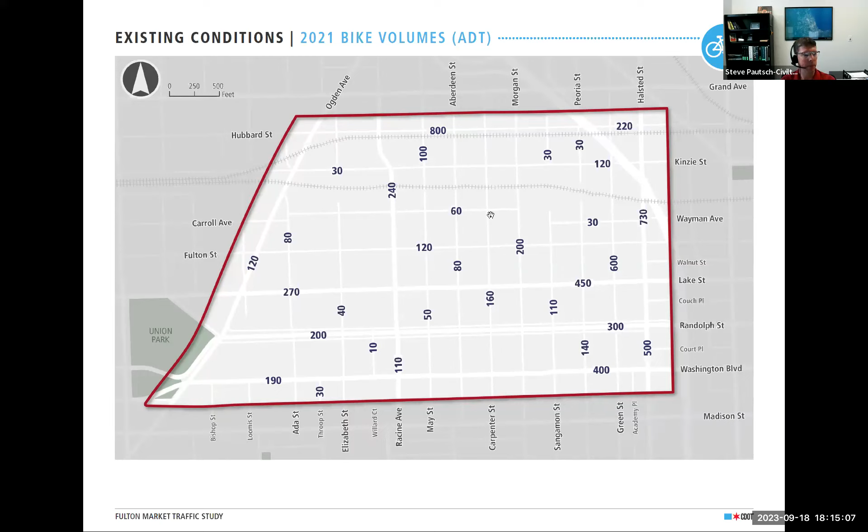Part of our data collection, we're being very multimodal—we're collecting all types of data. This map shows the bike volumes observed over a 24-hour period. I'd say this is more of an order-of-magnitude way to compare one street to another, since bike volumes are so variable depending on the weather and time of year. But you can see the streets experiencing heavier bike traffic than others.

And then traffic volumes—this is the number of cars counted on each street in a 24-hour period. Most traffic by far is on Ogden here in the West End. Lake and Halsted also have fairly heavy volumes compared to other streets. The north-south streets have fairly similar volumes, most in that 2,000 to 4,000 cars per day range. The one that sticks out is Green Street, with more than 7,000 vehicles per day.

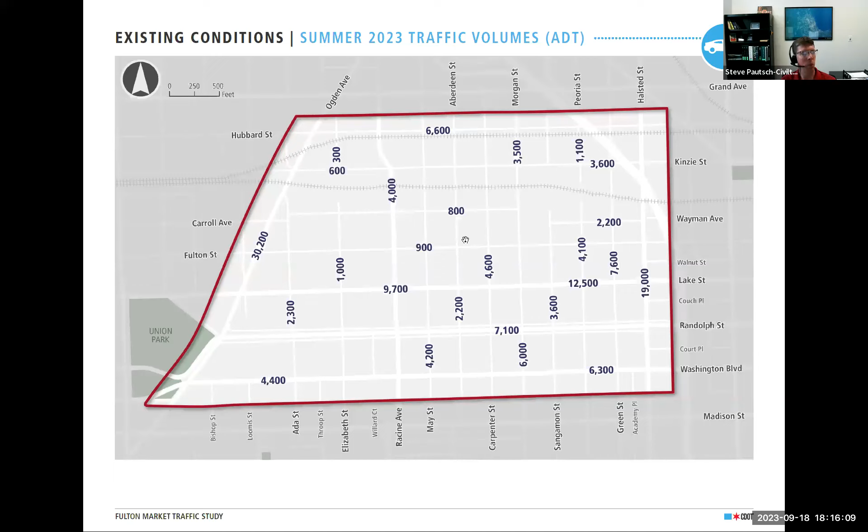So most of the streets we're seeing don't have extremely heavy volumes like you'd see in some other dense areas like River North. I think that's due to the geography of Fulton Market area, where a lot of the streets are discontinuous—they don't connect to other streets outside Fulton Market. That helps keep the volumes fairly low.

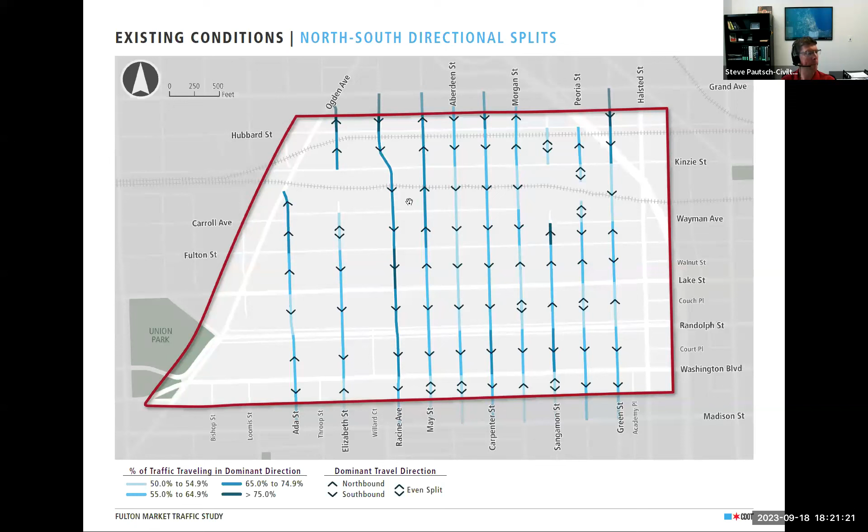Some other data we've collected—street widths and potential pinch points—is what this graphic illustrates. The red lines here are streets less than 34 feet wide, which we consider a bit narrow, especially if parking is allowed on both sides. You see that mainly on Racine, also on Ada Street, with a couple of other pinch points: a narrow spot on Morgan south of Lake, and also on Green south of Wayman.

Some other pinch points are shown on this map. These blue stars indicate a significant restaurant or hotel use—spots where there's often valet or other pronounced curbside activity, and perhaps places more likely to have double parking. We see that mostly in the eastern part of the study area, and also diagonal parking indicated by these slash marks. That diagonal parking can add a little friction, especially with high turnover and lots of cars pulling in and out, which can slow traffic a bit. So we wanted to show those locations.

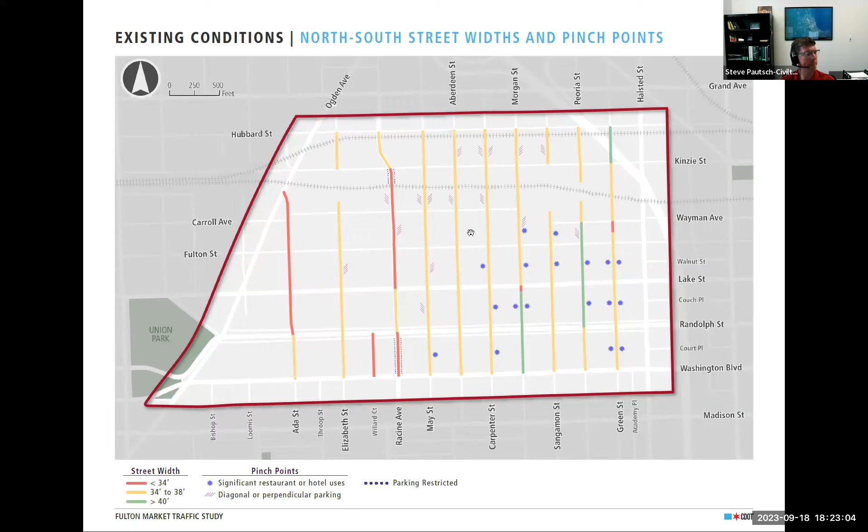When considering one-way versus two-way travel, there's an inherent set of positives and negatives to each configuration. So we wanted to think about each one when considering potential directional changes. These are shown on the screen here.

Benefits for one-way streets: wherever there's double parking or construction, there'd be fewer delays as cars can more easily navigate around the obstruction. In many cases, one-way streets can lessen the risk of sideswipe or parked car crashes, especially on narrow streets. If you're crossing the street, you only have to look one direction for approaching traffic. One-way streets can also free up space to install other amenities within the right-of-way, probably most commonly bike lanes.

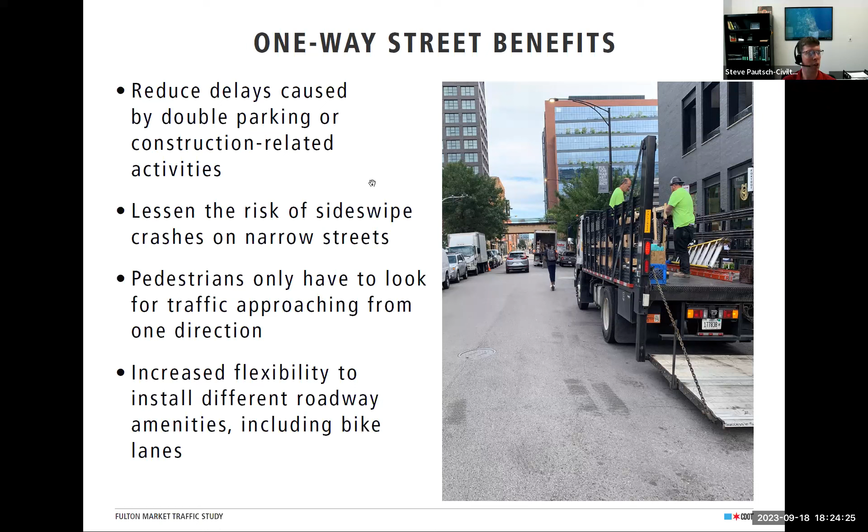But there are also some trade-offs, some challenges with one-way streets. Because there is more room, vehicles may tend to travel more quickly, and drivers may be more aggressive, especially if complementary changes like bump outs or other ways to visually narrow the street aren't made.

With one-way streets, travel times and distances can be higher as motorists circle the block to get to their destination—there's a bit more out-of-way travel. There's also a potential for wrong-way traffic that doesn't exist with two-way streets, although that can be mitigated with good signage and striping.

Oftentimes, if there is wrong-way traffic, it's happening right after the direction of the street is converted, and it generally tends to work itself out after a few weeks. Also, with one-way streets, the traffic going in the other direction has to go somewhere, so it gets displaced to an adjacent street. For that reason, when converting streets to one-way, you usually like to do them in pairs—if one's going northbound, you'd like a complement going southbound.

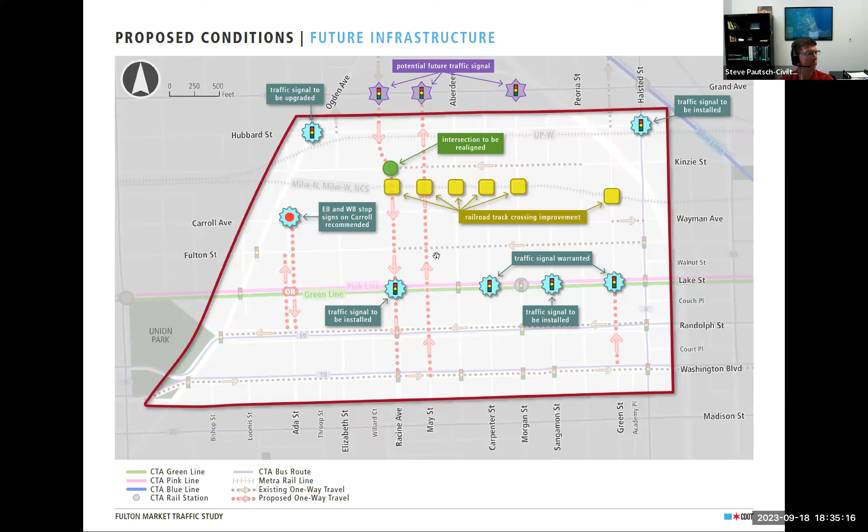Here's our potential ideas for bike routes through the Fulton Market area. I mentioned the one-way conversions on Racine and May would free up space to allow installation of bike facilities throughout the Fulton Market area, providing nice access to cyclists. That's something that's in the planning stages right now and requires more conversation, but we wanted to show it here just to show it is being talked about.

As is bike facilities on Morgan, where Morgan is fairly wide south of Lake Street. There's space to install a buffered bike lane on Morgan fairly easily with striping and no physical changes to the roadway.

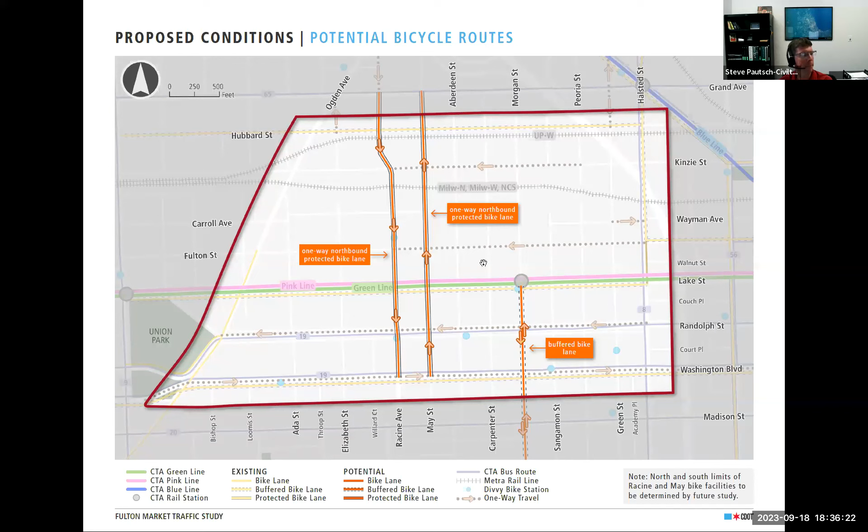So next steps for this study. We like feedback - that's why we're here. We're in the process of gathering feedback from stakeholders and incorporating that into the study, so we'd love to hear from you all. That feedback will help us finalize the recommendations for one-way street conversion, which is necessary before the railroad track crossing improvements can proceed. Once that's finalized, we'll finish the report incorporating all those recommendations, submit it, and help prepare cost estimates and identify funding for some of the infrastructure projects.

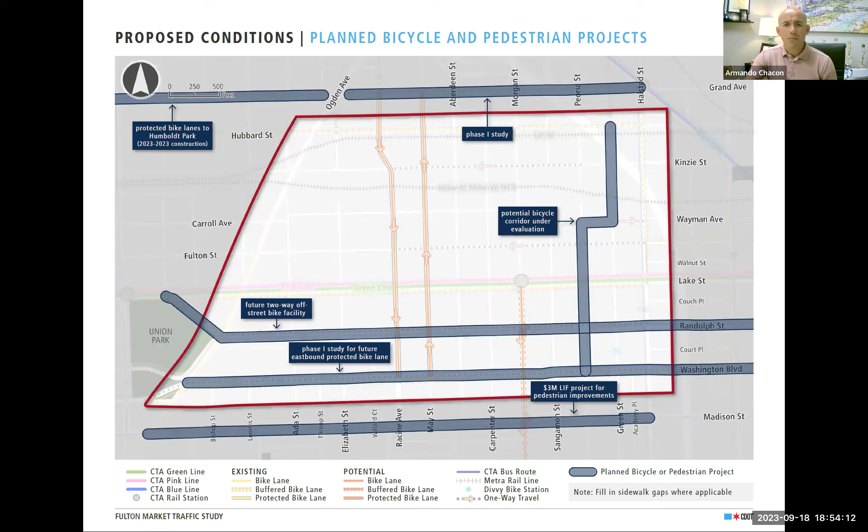However, let me get back to some of these other questions. Thank you, Nora—yeah, Dearborn has a two-way bike lane. Carl, I'll hand it back to you.

Okay, thank you. Also another comment or question from Matt Letourneau: Carl noted that the Randolph study is now in phase 1. Is this being led by CDOT or IDOT? CDOT. Thank you. Did pedestrian safety influence the recommendations?

Absolutely. Bike and pedestrian safety is paramount to anything. The basis for my question was wondering if you had pedestrian crashes and bike crashes separated out from the vehicular crashes and sideswipes as part of the crash analysis. Yeah Matt, we have that information—there's just a lot of material in this presentation so we couldn't include everything, but that will definitely be in the final report, with statistics, graphics, and recommendations related to pedestrian and bike safety.

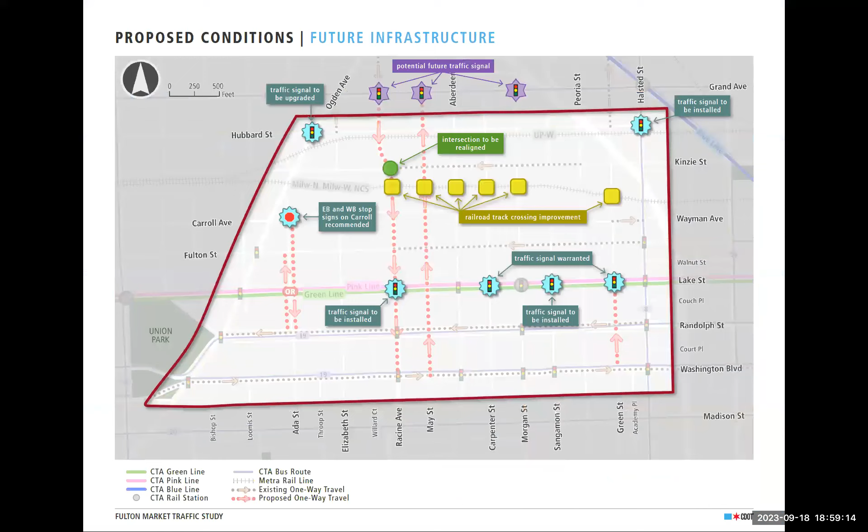what you've been showing, so it's good to see that's in line with our thinking. I wonder if there are any other east-west one-way proposals to go along with it. I know Kinzie is one way up to the area you're proposing—are you then proposing to keep Kinzie two-way west of that? And there is sort of a wonky triangular intersection at Racine and Kinzie. Is that going to stay as is?

There's some developments proposed there. I wanted to ask about that. And I guess, sorry, one last thing—did this study include volume projections that account for all of the various proposed developments? Sorry to cram so much into the question, but I had a lot on my list. Thanks.

Well, yeah, we'll start with the east-west one-way street conversation. Yeah, we're looking at that. So a lot of these east-west streets get a little bit tricky, I think, kind of like you mentioned, especially as they get further west towards Ogden.

We didn't see any reason to change any of these streets to one-way, especially if you're converting some of these north-south streets to one-way, leaving the east-west streets as two-way, like Carroll intersecting. That kind of helps to maintain mobility through Fulton Market.

So yeah, to answer your question, yes, we did look at that, and we are not recommending any changes to east-west streets. As for development questions, we're coordinating with DPD as projects come through. We're making sure that if there's a signal that's warranted, or signal improvements or some other improvement near the development, the developer incorporates that into their planned development.